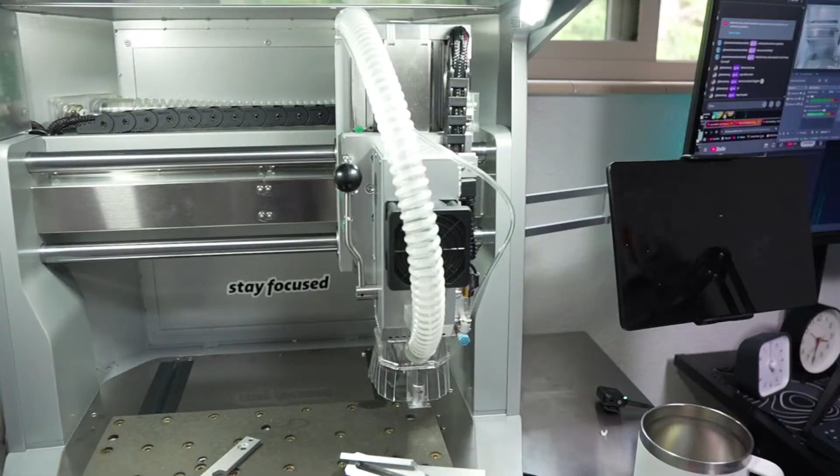So that is kind of what we're going to do today. That's a bit for the video part of this. It's not really going to make sense for the people watching the stream, but that's what we're going to be doing today. We're going to start a CNC project. We literally have 30 minutes. I don't even know if we can fucking do it in 30 minutes. I've never used this machine before, and we're going to do it right now.

The world's fucking burning. Our politicians are actively trying to destroy this world for personal gain. The motivation is slipping by the day. But regardless of whether you're motivated or not, you have to stay focused on your passion and your goal, because if those people didn't perform in those theaters back then, our culture would be different today.

So you, as a creator, as a person that wants to make shit today, know that you are influencing the future, and it is such a crucial time right now. Be that person that inspires other people to go the extra mile. Be the person that inspires people to actually do something. You know what I mean?

I have this logo on my shirt called Stay Focused for a reason. It's the idea of having a project, a passion, a purpose, and to stay focused on that constantly, no matter what. So whether that distraction is me or someone else or the internet entirely, I would invite you right now to take inventory of what's distracting you, remove them and stay focused. If that means you stop watching the stream or this video, then stop watching it and go lock the fuck in.

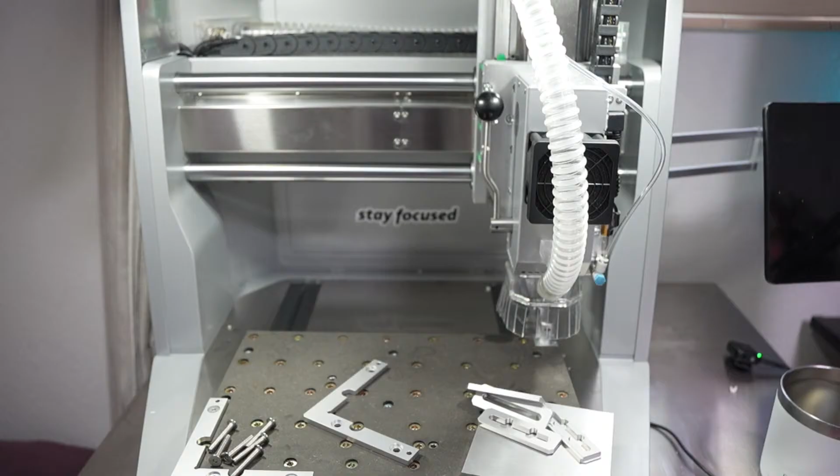All right. Live stream is in session, boys. That was just a little bit for the people watching this video afterwards. If you're watching this video, click off. Go stay focused. You know what I'm saying? Okay.

Jacob Jones stream speed run. Are you recording? No. It's fine. "Man, I just wanted to see funny CNC stuff." Don't worry, we're gonna see funny CNC stuff. Did we set it up? Yes, we did, and we're gonna go over that in a second. Yay, clean room. It is a clean room, actually. "Bro is not David Goggins." I am not David Goggins. I'm Jacob fucking Jones. JK, stay focused. You're goddamn right.

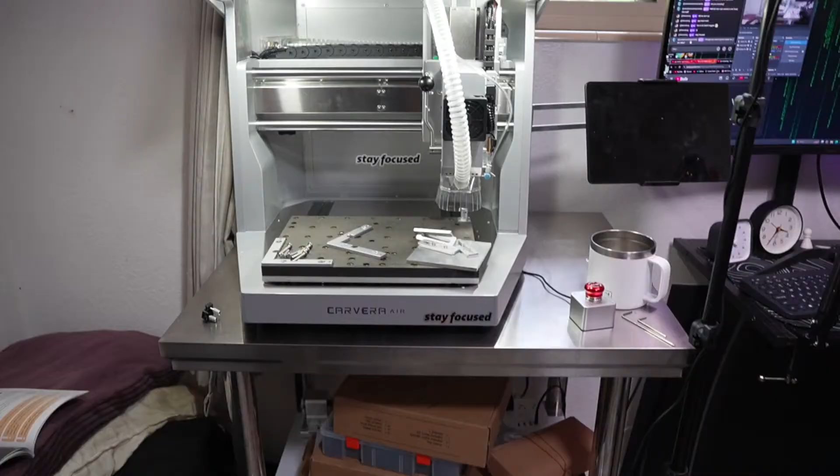I thought you weren't gonna stream the CNC video. No, we are not. But this is just a first test, and that is exactly what we're gonna be trying to do right now. So let's do that right fucking now.

Yesterday, please tell me this is still okay. Good. Yesterday, here is what fucking happened. We were like, why the fuck is it not plugging in? Why is it not connecting? It's because apparently on this microwave supercomputer, there are 30,000 fucking inputs. And on each one, I had to plug in the goddamn cord.

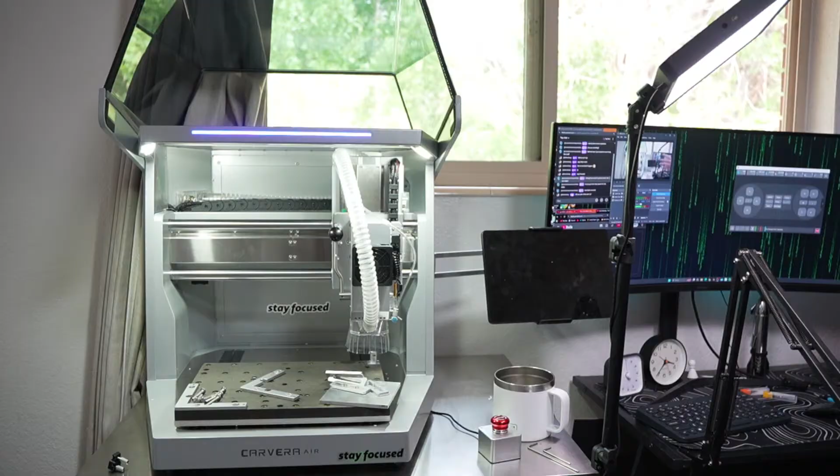I had to go through all of the different ports that were available inside of this fuck-ass software. And then after that, I had a fucking... Oh my god, dude, the process was so annoying. It took me hours to be able to connect this to the thing, and now it just works. It's over Wi-Fi. I don't understand how it works, but it works now. And now we can do this weird hunky-dory.

You'll see over right here, we actually have a CAM software, and we can move it. Oh, let's make it a little more pronounced. Let's do 10 millimeters. See, we can move it now. W. That's what I'm talking about. That is what I'm talking about.

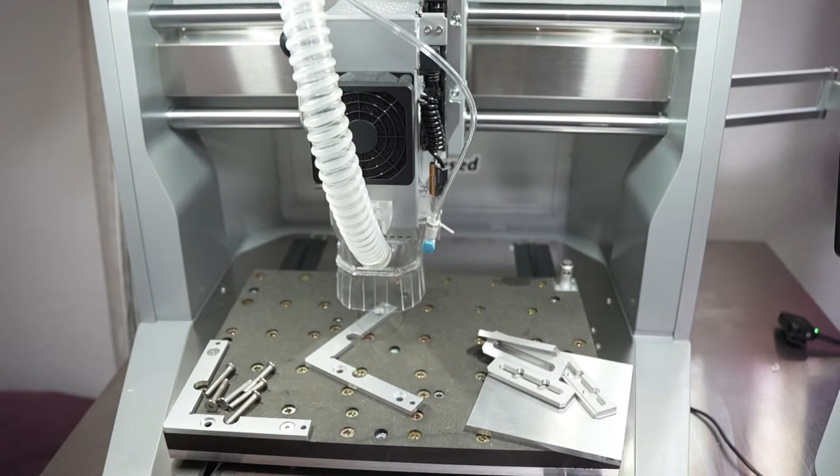And our goal today is actually to just do a tutorial, but then again, I have 30 fucking minutes because it took me goddamn forever trying to figure out how a microphone works.

Let's see. So you just did a big speech for the video? Kinda, yeah. And don't record it? Yeah, kinda. Did you give China your IP? I did. I fucking had to, unfortunately. Is it me or is the volume just a bit low? Adjusted right. Oh, well, hold up. Adjusted right there, and now it should be good.

Okay. Okay, boys. It is time to lock the fuck in. So there is so much that goes into CNC machining that I didn't even actually fucking consider at all. There is so goddamn much that is required to make something just go burr, and holy fuck, it's atrocious. It's actually atrocious. So today we are just going to, sorry, this is extraordinarily loud. We are just going to try our fucking best to get this thing to work. Like, that is all we kind of can do.

Okay. Oh my god, please tell me it's still good. It is. Okay. So we are actually just going to do a preloaded project. What is this? Think of it as like when you install the Arduino IDE, there are example sketches. We are doing an example sketch. Or like when you buy a new 3D printer, there might be like a Benchy inside of the thing. That's exactly what we're going to try to do throughout the next few minutes right fucking now.

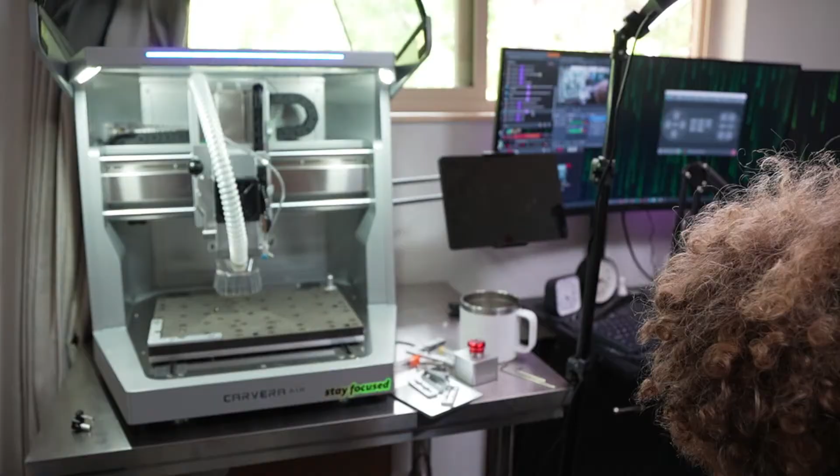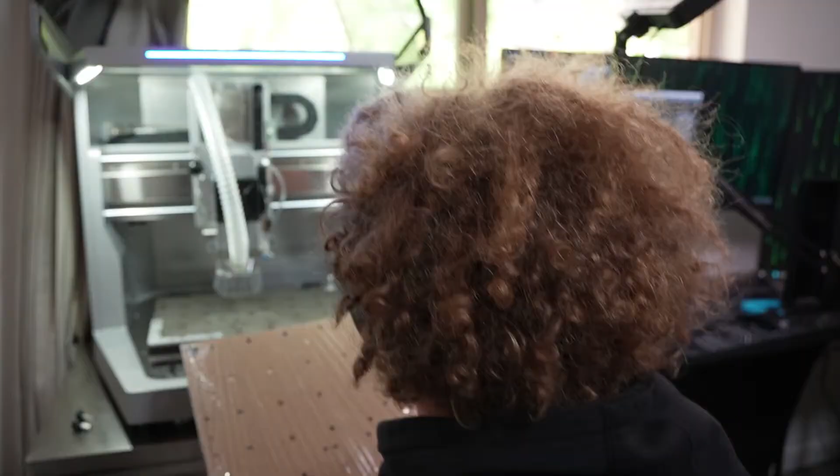Dude, there's so much shit that we should have done today, but this goddamn microphone was, I don't even want to think about it. Okay. So we need to start out by, oh, there's so much shit we got to do. Okay. We're going like this. Okay. We literally have not even 30 minutes. Our time was completely wasted today on just trying to figure out how in the actual fuck this fuck-ass thing works. And yeah, no, so fuck DJI for that. Although their products are really cool, still fuck them for that. They wasted my day.

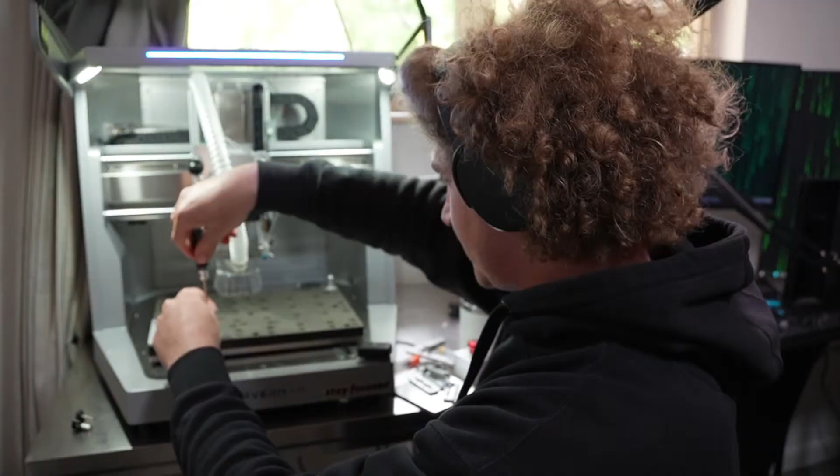And yeah, I watched like 30 fucking videos and read the entire manual. The manual is ass. Their teaching videos are ass. We just have to fucking wing it, guys. We just have to wing the fuck out of this thing. And hopefully it just performs, you know what I mean? That's all we can do at this point.

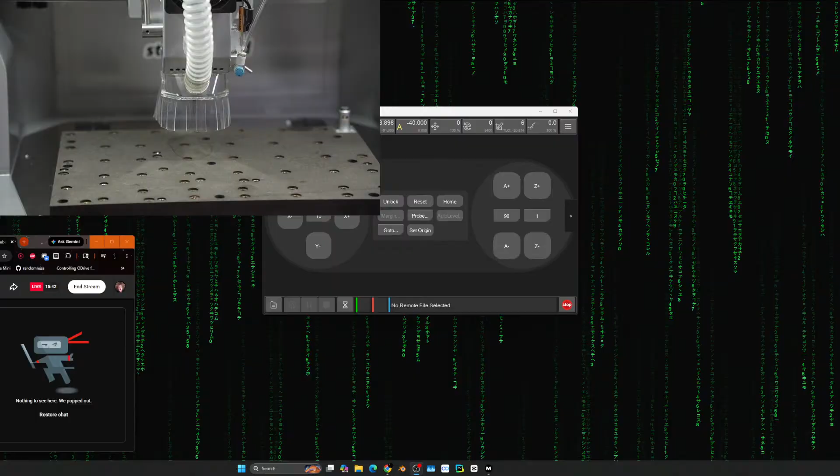Okay. Well, let's see. Like this. I hope there's no background noise, but if there is, whatever. Well, so we are going to actually, well, don't fucking pull out the thing. We're actually going to start by going right here. This is what we're going to start out doing. All right, let's go like this. So like that. Okay, if you guys can see, please don't tell me this thing's just died.

I don't know. Okay, so here you can see this thing, right? This is basically, what the fuck would you call this? It's like a controller kind of, right? See, I'm gonna click this button, it moves over. I click that, it moves over. I click this right here, it moves back slowly. I click this, it moves the thing. Let's do 10, right? You know how this works.

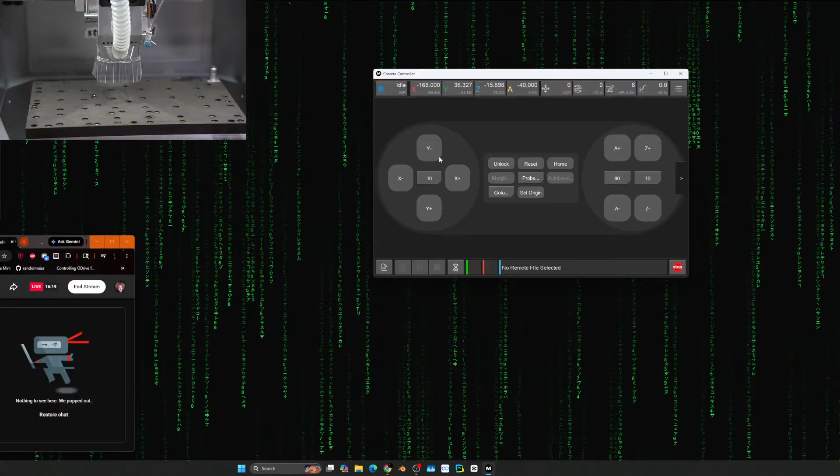Now, the $1 million fucking question is, how do we get a file from here onto the fucking CNC machine? I don't know.

Let's do the relief test. Pirate ship. Select, rename, delete, new folder, relief.

The question is, do we have to install this thing right here? I don't know why, but it protects the build plate, I guess, but I don't know what with. I don't know how. Let's find a video real quick.

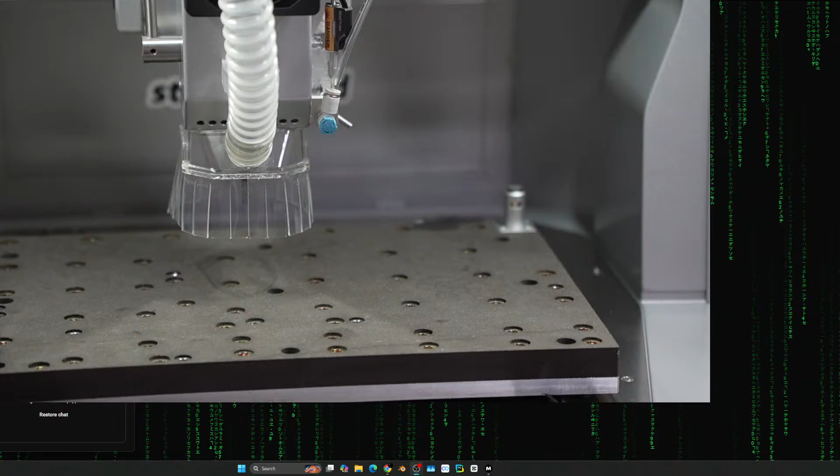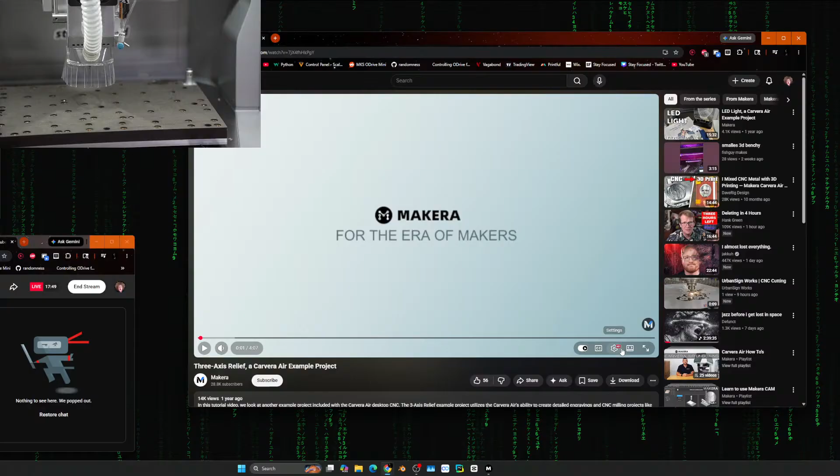Oh well, there you go. Let's find a video. Actually, it might be in my history. You guys are gonna see some wonky history right now. Go to history, right here. I don't know if you guys can do that, but this is what we're gonna follow. Not full screen. Jesus Christ, I have to be at work in 4 goddamn minutes.

Hey everyone, Jason from Makera here with another Carvera Air tutorial.

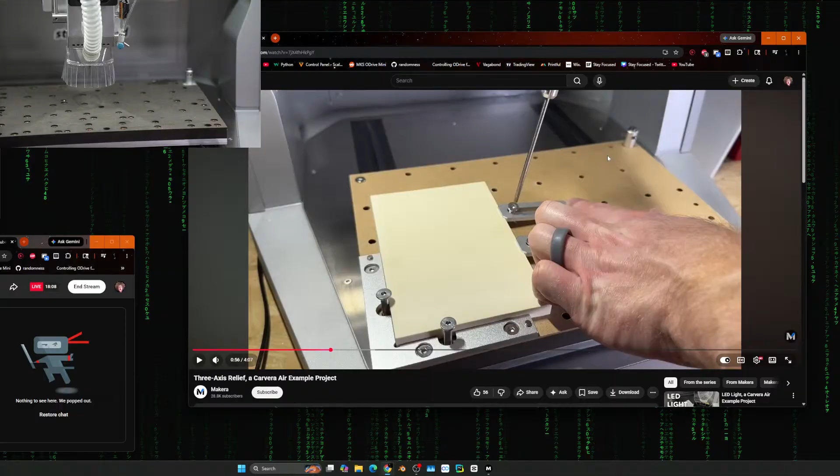Yeah, how do we install the goddamn thing though? Okay, so we're just gonna look at it. How does he install it? Okay, he just has screws. Okay, that's what we're gonna do. That's exactly what we're gonna do.

Dude, what is up, my boy? I hope you're doing absolutely swell, you big man. Sir, I love calling you Terry because it just fits.

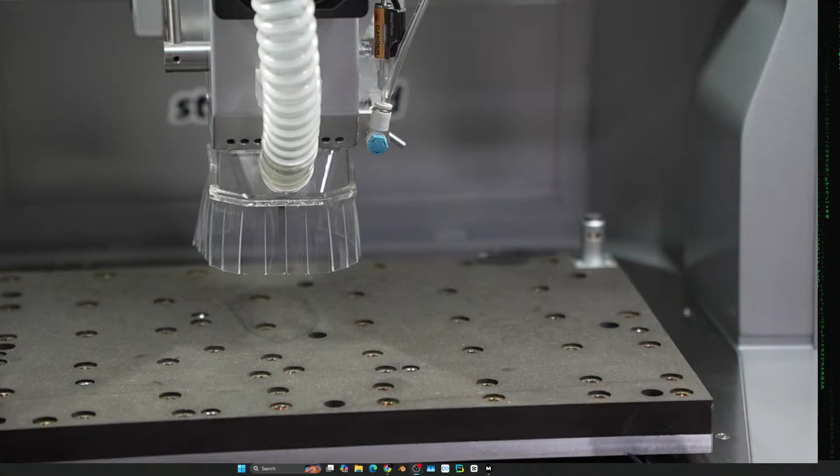Okay, here is what - oh shit, there's 2. That's cool. Here's what we're gonna do. What's happening? Okay, you have these now, you have to install them. I can only assume just like this. Yeah, just like this. Well, why does his look different?

I don't know. Okay, let's go like this. Let's go like this. There we go.

Oh, it smells so plasticky. Not plasticky, but I don't know how to describe it. Let's see.

Exactly dude, Terry reincarnate, that is actually big. Okay, I don't know if this has to be on every single thing, but I don't even know, dude. We're gonna do it anyways, you know what I'm saying?

Okay, let's go like this. God, it sucks because I literally have to be at work in like 3 minutes. I was really hoping we'd start the CNC today. Maybe we can. We are to follow the homie's instructions exactly and just pray that we can start the CNC machine. We might have to stop it, but if we do, we'll learn stuff anyways.

Okay. These things are just to protect the thing underneath it.

Okay, well, why did I just... Jesus Christ, I'm fucking autistic. I don't know why I didn't just remove the... Okay, yeah, well, yep. Okay, let's go like that. That is good. I hope, I pray, I think.

Okay, let's see, let's see. Let's go like this.

Bro, my OCD, one sec, let me move this. My OCD is actually tripping because I saw a screw that wasn't fully in, surrounded by a fully in one. Well, SLB sometimes, you know what I'm saying? SLB sometimes. But now, we must.

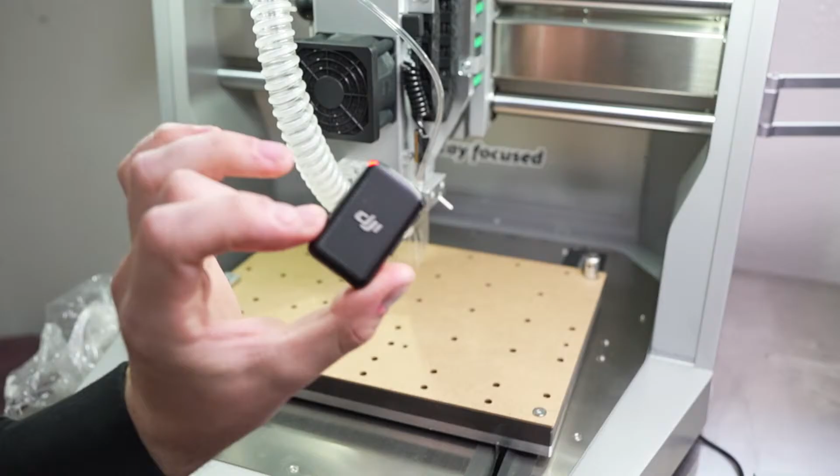Okay, now we need to find some stock materials. Where is that? Right here. Okay, I hope you can see this. I don't know if you can.

Yeah, there we go. Okay, the thing we're cutting is, I think this. Oh, it feels so weird. It's not wood, by the way. It's like a polyurethane or some type of thing.

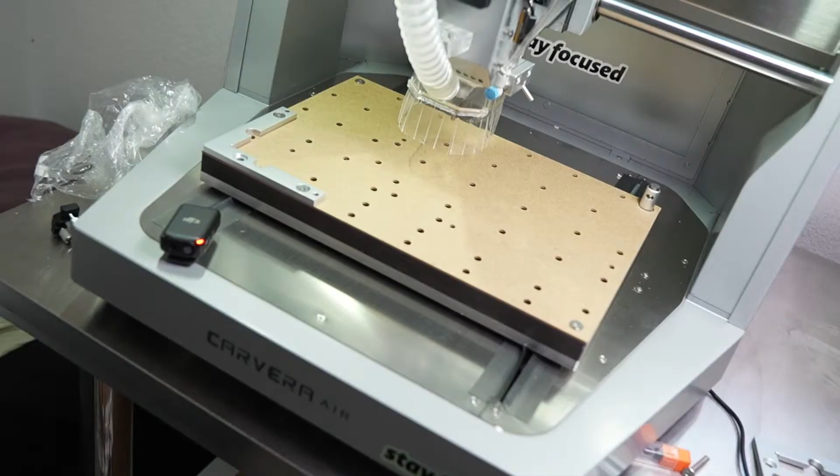Let's go like this. Please, for the love of God, work. Okay, let's speed run this. Okay, well.

Yes, I did. So basically now we have - so okay, this thing, right, the iPad, I don't know why the hell it doesn't work. We don't know why, we don't know how, but it just doesn't work, and that's that. So yeah, but that's how it be sometimes.

Let's go like this. Let's go like that. Let's go like this. Close, let's go like this. Actually, let's just go home. All right.

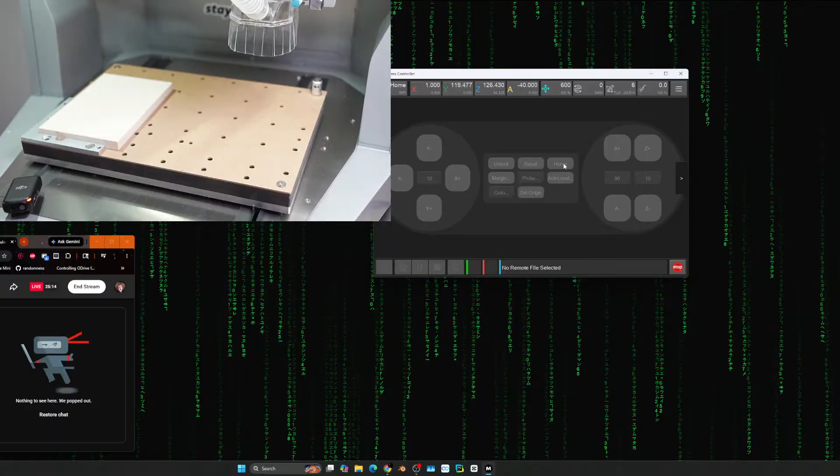Now we should be able to. All right, yeah. What just made that noise? Oh my god, don't tell me that there's a screw under there.

I hope that there's not. But there might be, I think there is. Damn, well, there might be a screw under there. Well, shit, well.

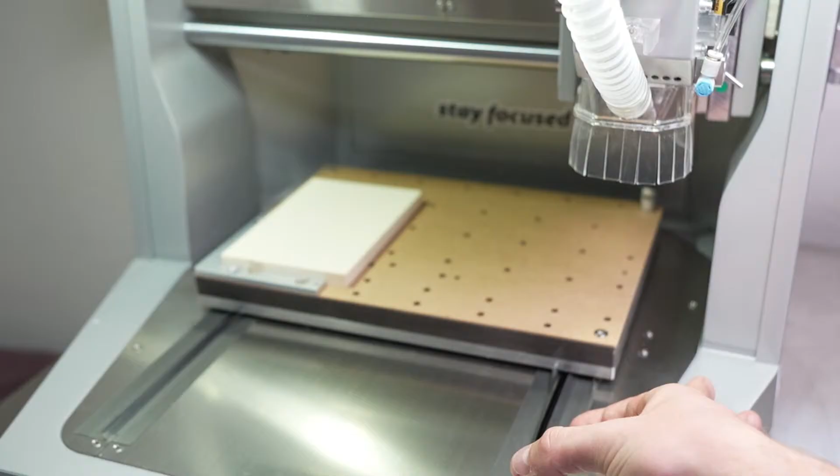Well. What is this and why is it right there? I do not know why. Oh, that's why, god damn it. Well.

Good to know, this is not supposed to be in right there. That is not supposed to be. It just completely demolished this right here. Oh well, we're learning slowly.

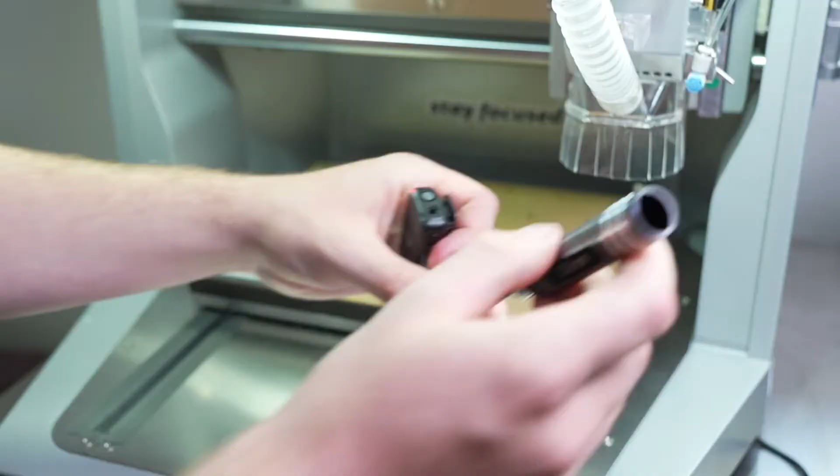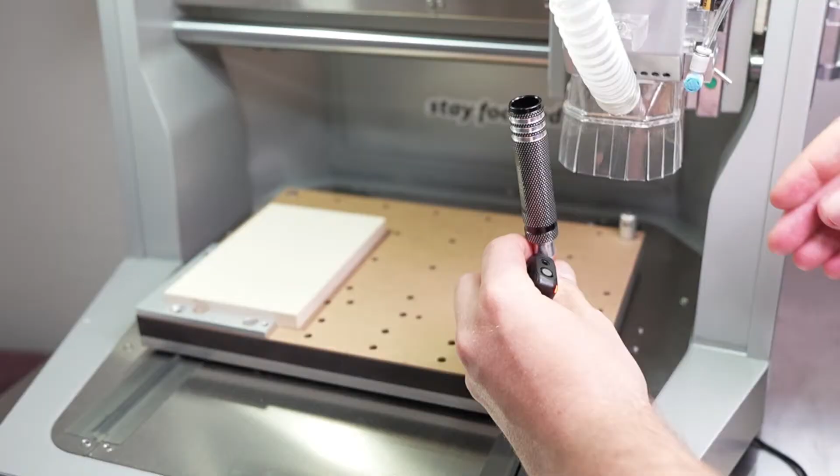That sucks butt, that sucks a lot of butt. Okay, well, we have to move it. Yeah, that sucks a lot of butt. I don't know how that's supposed to be secured. But, oh, the back one's destroyed too.

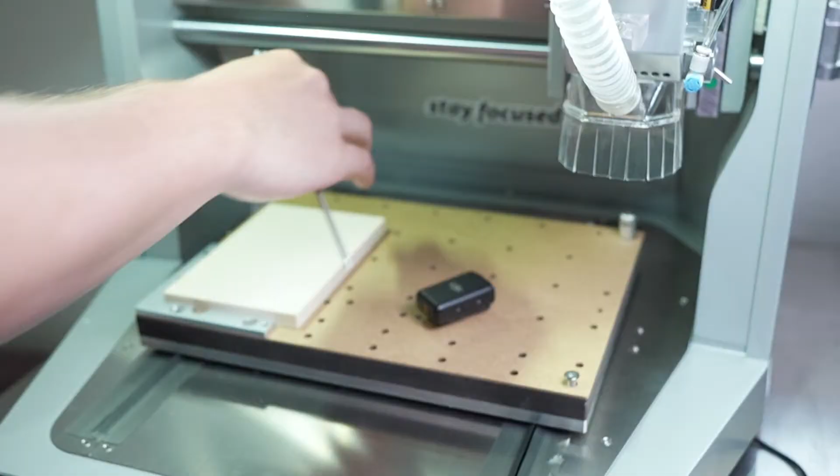Fuck me, dude, we haven't even started the goddamn printer. We've already destroyed the damn thing. Oh, that's ass, dude, completely destroyed it already. These tabs back here, fuck.

Well. Well. Let's see.

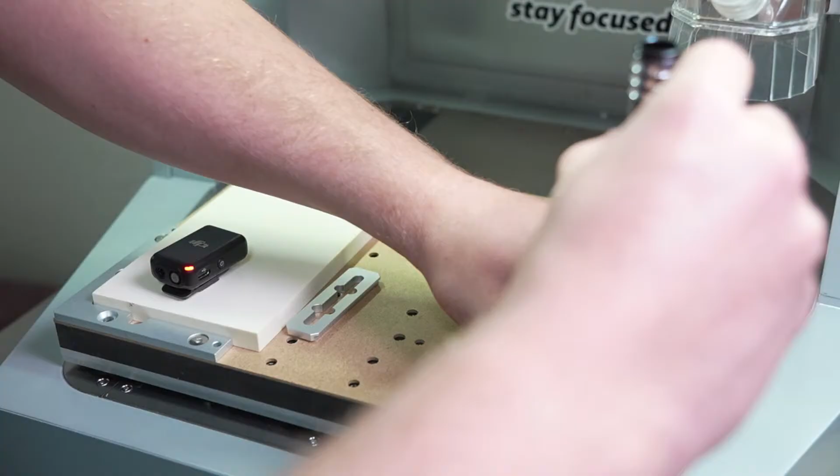Oh, this is going to be such a long learning process. I can't even describe just how slow this is going to be. Okay, well, that's as any learning process is. Learning sucks, or learning is hard, and doing hard things sucks, and sucking sucks. But sucking is the price that has to be paid for greatness.

Well, please don't take that out of context, if you know what I mean. Yeah, well. Like this, now let's get in the right goddamn screws. We've only destroyed about $20 worth of stuff so far, so we're doing pretty good. Let's go like this.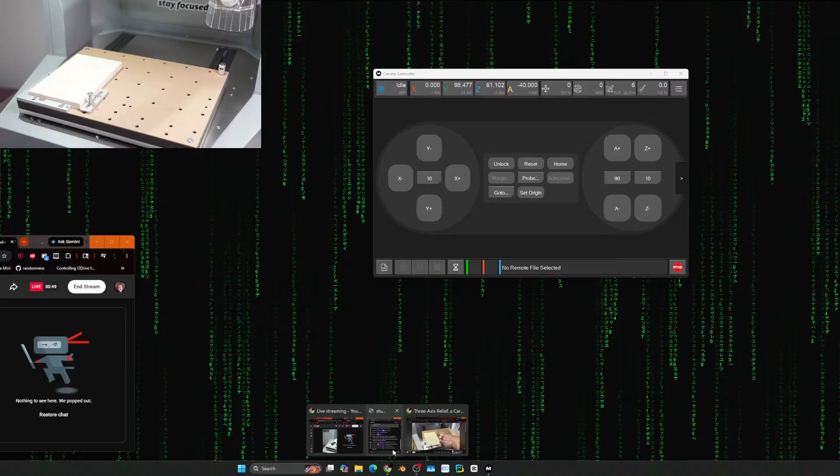Should I feel like this is something I should watch the video for? Let's give it a quick watch. Let's give it a quick watch. Let's go like this, let's go like this, let's go like this. And I am actively almost late for work.

That's okay. Guidebook: aligning it with anchor position 1 in the bottom left corner of the bed and securing it by placing a top clamp along all the... Amazing, that makes a lot more sense. That makes a lot more sense.

What was that? Okay, we know what to do now. Let's go like this. I was doing it wrong indeed, but now we know I was doing it wrong.

Dude, this sucks ass that I have to go to work right now. If I was a responsible human being, I would be going to work right now, but we all know that's not the case. I don't think it's ever been the case. There are projects to be made and progress to be made upon those projects. This is paramount to anything.

Okay, let's lock in, because we have nanoseconds to do this. Well, whoever designed this is a little interesting, because I can already tell this is not tight. It's not a good fixture. It's hard to describe if you guys aren't here, but trust, it's just bad.

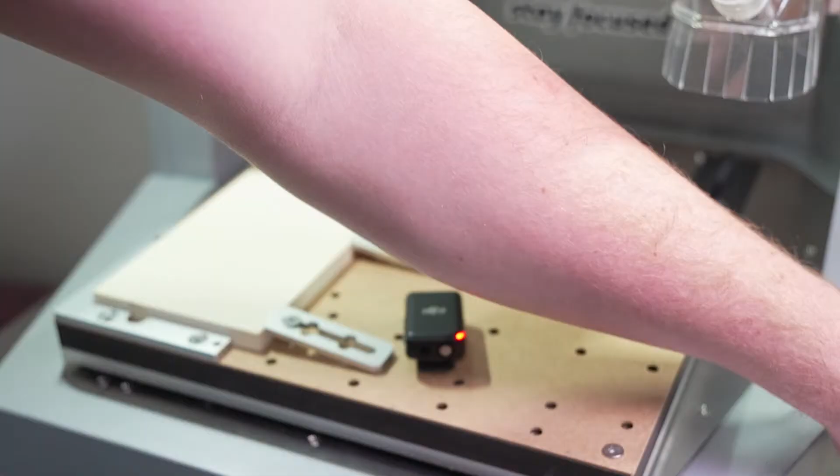Well, that's really long. We need screws now. More screws. We have one right here, and one right here. That should be good, right? I think.

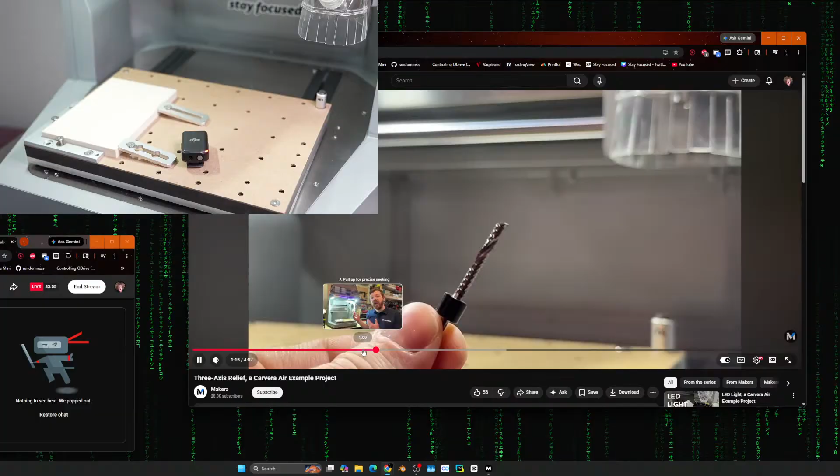Okay, we know. In this video, bed and screws included in their toolkit. Next is... dude, I'm actively late for work right now. Actively. God, work sucks, man. Why? Why work? Why do I have to go to work?

I desire spending my time elsewhere. There we go, I think this makes more sense. Okay.

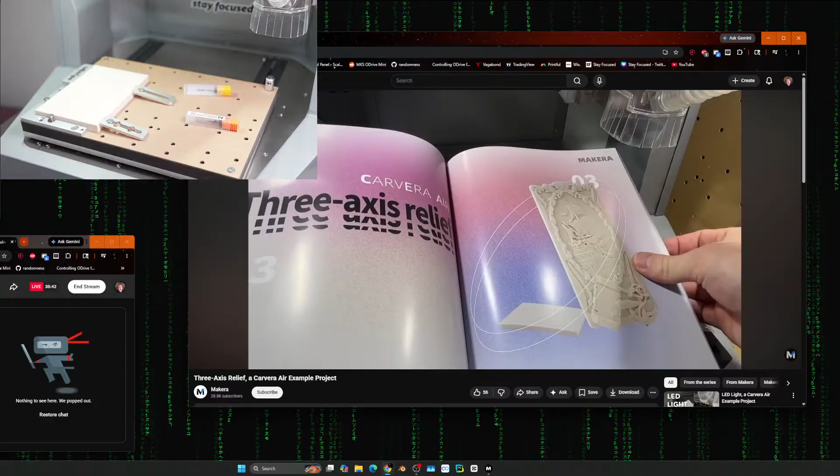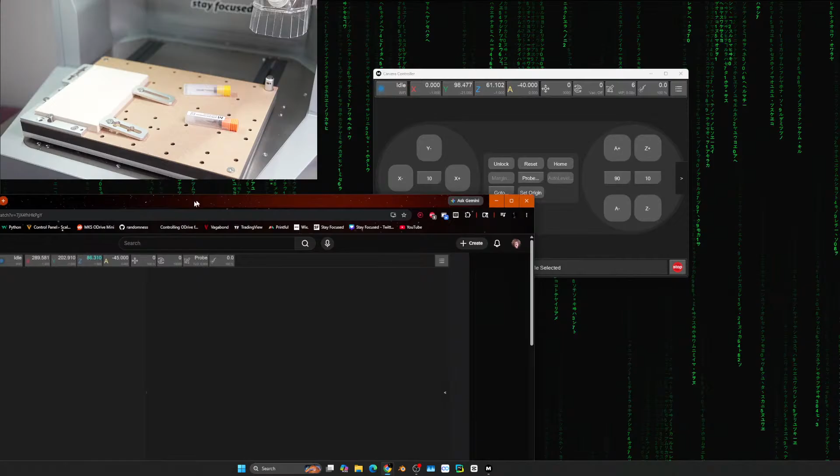With our CNC set up, we can head over to the Carvera Controller app to configure and run this job. First, we must connect to our Carvera in the Carvera Controller app. Then within the files menu, there's an examples folder that includes all the example files for the project shown in this guidebook. There's only one file for the 3-axis relief, called pirate ship. Once open, we can preview the design and toolpaths before clicking config and run. We want to make sure the file is aligned with anchor point 1.

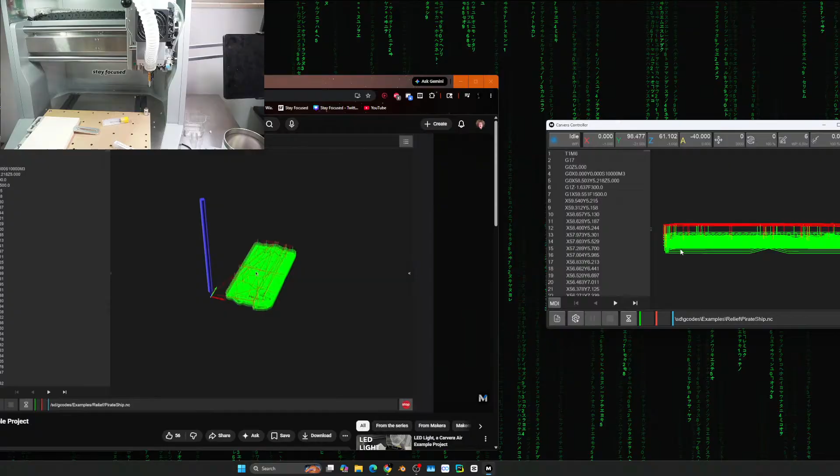How does he preview this? Oh, look at this. This is the first time I've seen this. It's kind of cool, actually. Look at that. That's sexy. You guys can't really see it. I guess it's off the screen a little bit, isn't it? Sexy. Very sexy. Okay. Let's go like this. Then let's go like this. What does he do after this?

Once open, we can preview the design and toolpaths before clicking config and run. This needs to go away. We want to make sure that the... what did he just say? How does he preview it? What does he click on? Once open, we can preview the design and toolpath. Yeah, see, he doesn't say what he clicks on. Oh well.

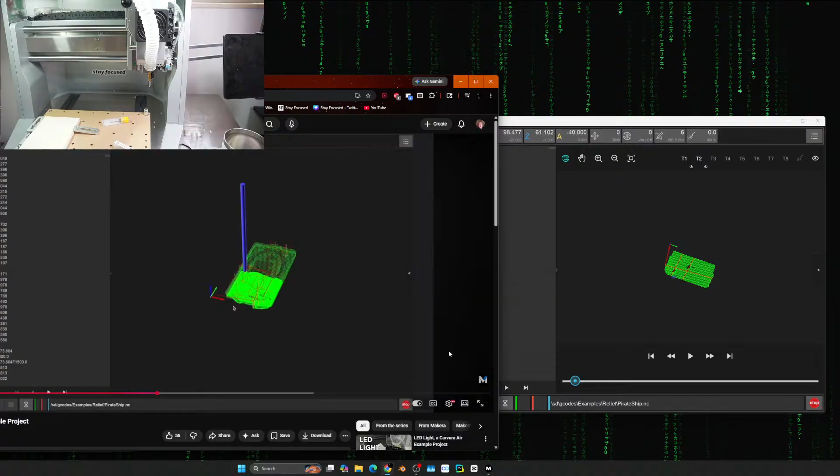There we go. That's our goal for right now. How long will this take? It probably says, but I have no idea. Okay, cool. Now, where does he click? Preview the design and toolpaths before clicking config and run. Okay, settings. Click settings. Okay, we're getting there. Well, there we go.

That the file is aligned with... Well, my stuff looks a little different. Auto ExtOut. What? Well, anchor point 1. Set origin. Okay. Sure. In the Carvera controller, just like our stock. Oh well.

Tutorial hell, Ben here. Yeah, dude. Seriously. Oh, what's up, my boy? I hope you're having a swell time. Thank you for stopping by again. By the way, I checked out your channel. You were a minor like 8 years ago. You're no longer a minor, big man. There's no way you were a minor, because your videos were like 9 million years ago. Now you couldn't be anymore. That's not possible. You lied to me, big man.

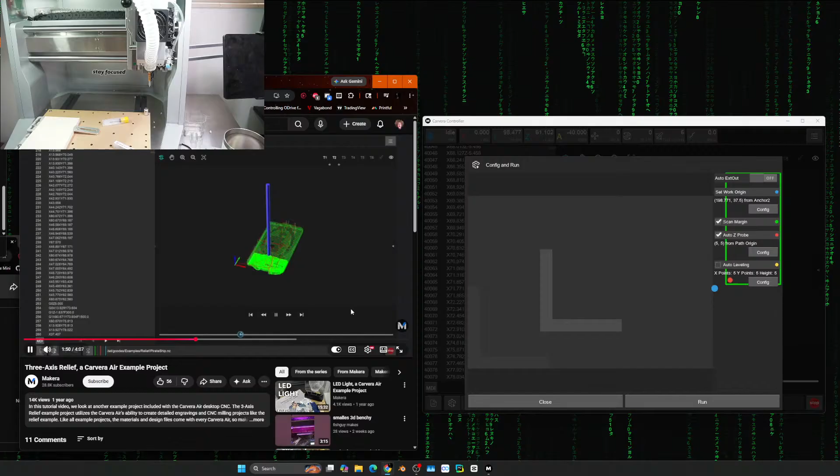We gotta lock in. We are late for work right now. Config and run. We want to make sure that the file is aligned. See, he has all this stuff. I don't have any of that. None. I am extraordinarily confused right now, because okay, we're gonna close this. Okay, we have his selected thing. Let's do exactly what he does.

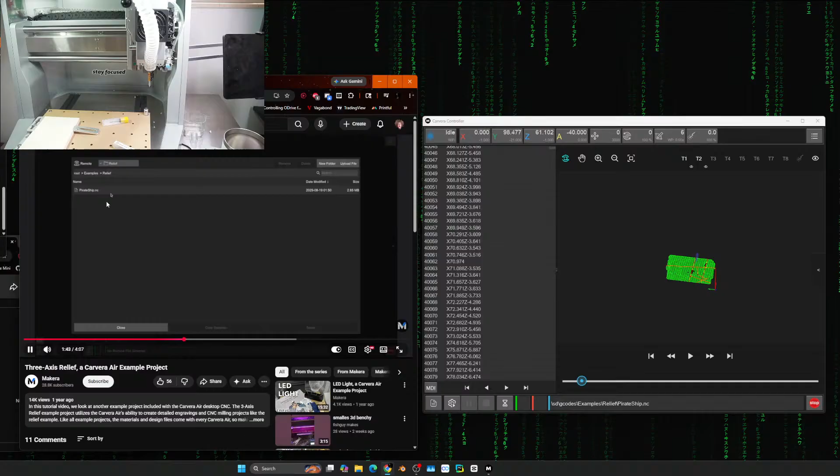Then within the Files menu, there's an Examples folder that includes all the example files for the project. Relief, Pirate Ship. Okay, select. For the 3-axis relief, and then he clicks on it. Once open, we can preview the design and toolpaths. We know how to do that. We're chilling. Absolutely bussing. Okay, what does he click on? Dude, this guy needs to get a cursor highlighter, man.

Oh, here's the orange triangle thing. This is not supposed to be right there, nor is that. This is supposed to be in the corner. Okay, let's do that. Aligned with anchor point 1 in the Carvera controller, just like our stock. Carvera Air. Oh, what? Okay, config. Just like our stock is on the bed of the Carvera Air. As shown in the guidebook, we want our offsets to be 3 millimeters for X and 3 millimeters. Okay, let's do that right now.

3. I'm assuming, I'm praying, I should say. I am absolutely praying to God right now that this is in millimeters and not nautical miles. For Y. We also want to enable scan margin. This traces the perimeter of our design before cutting. And auto... Okay, scan. Did he press okay? We also want to enable... We want our offsets to be 3 millimeters for X. Jesus Christ. 3 millimeters for Y. Okay, dude, he needs a fucking cursor highlighter, man.

This is gonna give me... Enable scan margin. Oh, well, look at that. Look at that. We're getting closer. This traces the perimeter of our design before cutting. Okay, scan margin. No. No, okay. And auto Z probe, which will set the height of our stock automatically. We do not auto Z probe. Sure. Leveling for this project, as we'll be machining all the way through the top surface for this particular part.

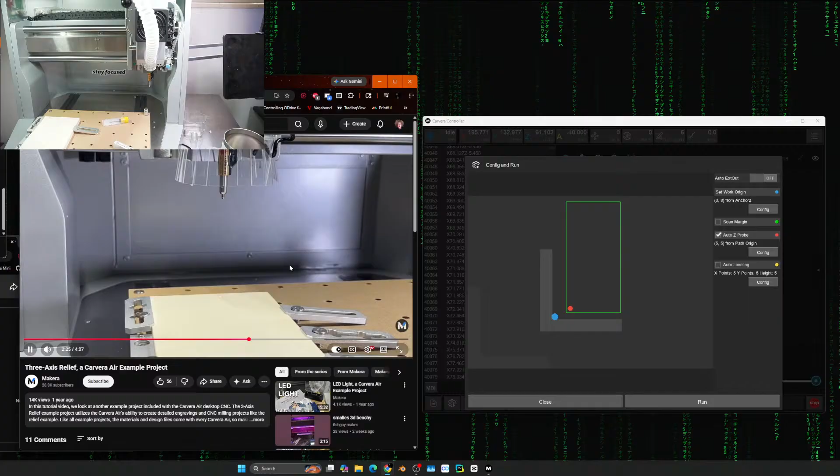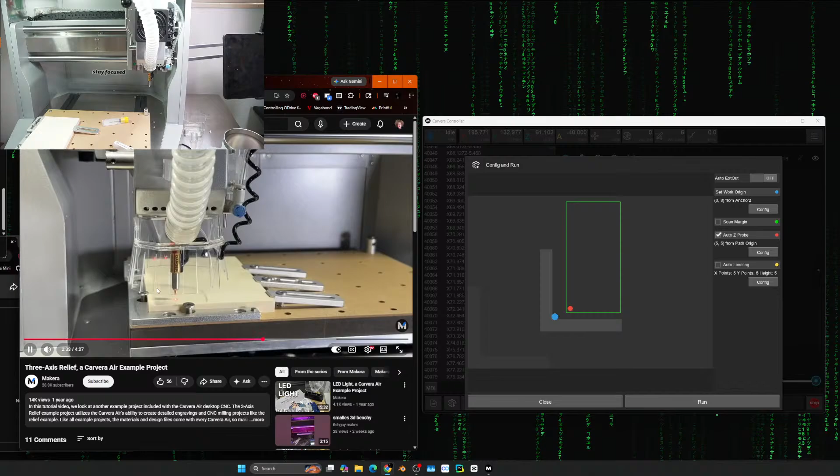The Carvera Air will first begin by scanning the perimeter of the part using the laser pointer built into the wired probe. Check to make sure that there's no... But you pressed on scan margin though, did he not? No clamps in the way or obstructing this margin. The Carvera Air will then probe the point set within the controller. I'm fucking terrified right now. We're just gonna do it. Before prompting us to load tool 1, both in the controller app and with a flashing light on the machine. After loading tool 1, the 25mm single flute end mill, we can press the button on the top of the Carvera Air to begin machining this part.

For the 3-axis the machine will start by roughing the stock using the 25mm bit. You can always monitor the progress of the machine in the Carvera controller app during the manufacturing process. After the roughing process has been completed, the Carvera Air will prompt us to load tool 2, which is the 30 degree. Once we press the button to continue, the Carvera Air will begin to cut the fine detail features of this design. It's difficult to see what's happening as we're cutting so deeply into the soft stock, but again, you can monitor what's going on in the Carvera controller app. Lastly, our machine will prompt us to load tool 1 again so that the part can be cut from the stock with an outer contour cut around the perimeter.

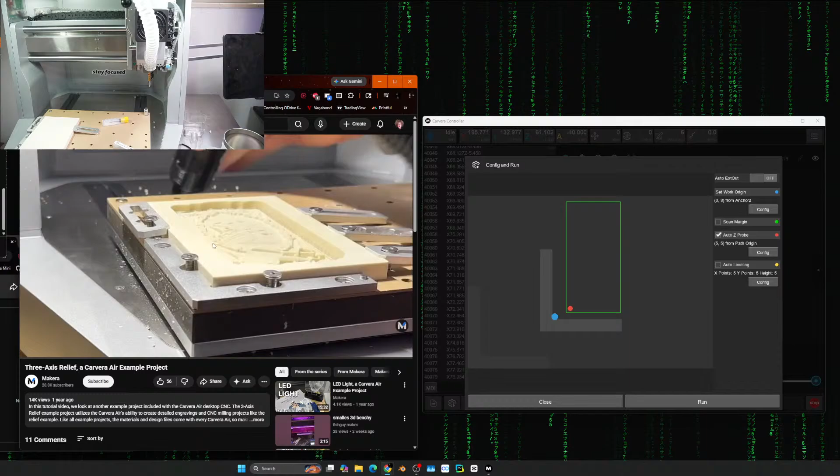Once manufacturing is complete, you can clean off this part using the brush or a vacuum to reveal the detailed design. After releasing the top clamps, you'll notice that the part is held onto the stock using what's called tabs. This stops the part from flying loose during manufacturing, and the tabs can be carefully cut using a small handsaw included in the samples and materials kit. And that's all there is to it. This is simple. Okay, that's what we're doing.

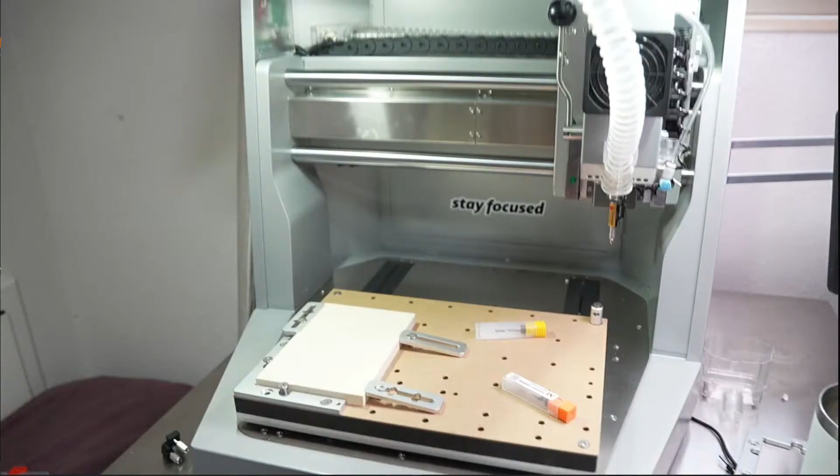Okay, yep. We got it, boys. Let's lock the fuck in, yeah? Let's lock the fuck in. Oh, well, let's first remove everything out of the way, right? Let's do that, ideally. Everything's not in the way. Okay, bam, bam. I think it's good. This is the moment. Make sure it breaks this machine. We pressed 3 buttons. I don't know what buttons they did, why they did, or who they did, but we pressed 3 buttons. And that is what we're going off of right now.

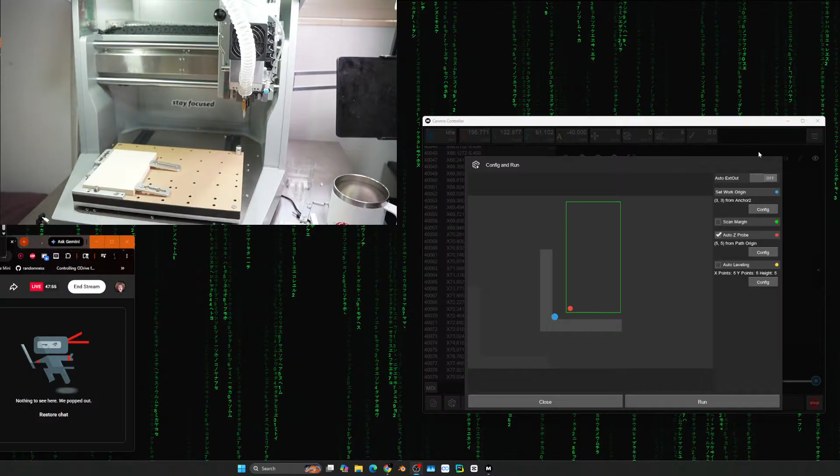Okay. I am mortified right now and scared to death. But there's only one thing we can do. And that's to press go. That's to press go.

He unclicked scan margin, so this seems off. No, this seems off compared to his. Like look at his. Let's look at his real quick. Right? Like let's go right here. Look at this. His thing is in this corner, and wait. Auto set origin config, block thickness set by Z probe, offset, note, work. Okay, look at this. This is different. This is way different than his. His is blurred out. What is different?

Scan margins. Anchor point 1 in the Carvera controller, just like our stock is on the bed of the Carvera Air. As shown in the guidebook, we want... Oh, anchor 1. We really click that. Config. Anchor 1.

Look at that. If we press go right there, we would have been royally fucked. We would have been fucked in the ass hard. Like just absolutely pounded from behind rigorously. That would have not been good.

Okay, boys, I think we're good now. Well, let's just double check. Config. That seems good. 3 millimeters for X and 3 millimeters for Y. We also want to enable scan margin. This traces the scan margin. Enable scan margin. Okay.

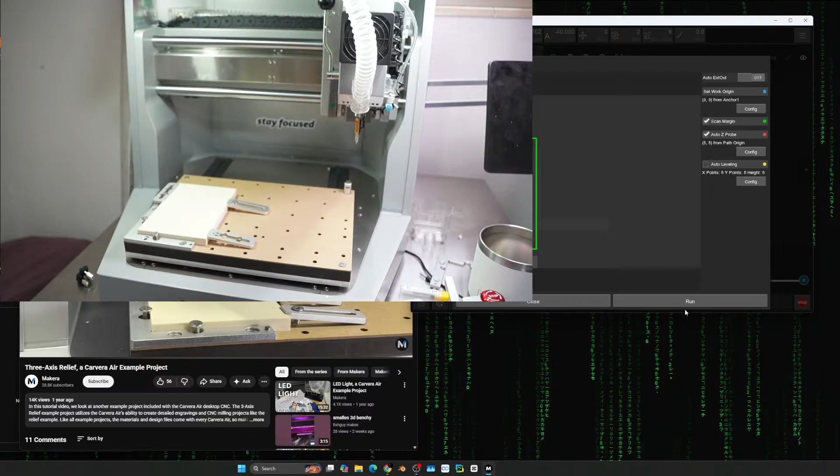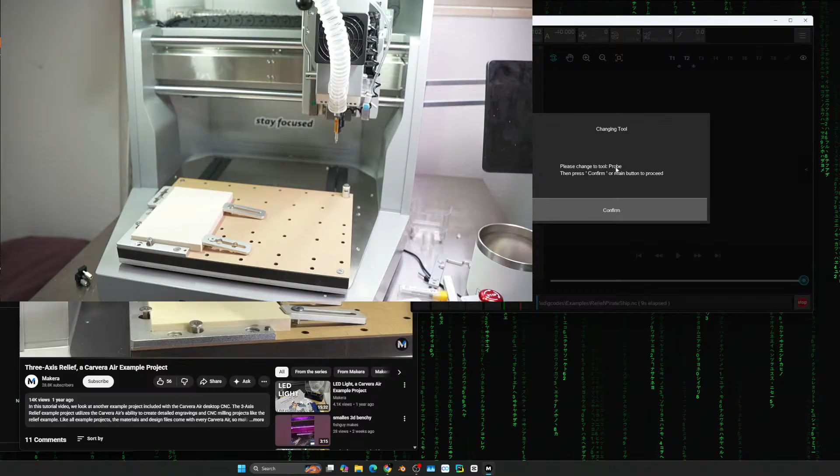Lock the fuck in. Let's see this shit go. Okay, 3, 2, 1. Boing! Wait. What just happened? Boing! Oh. Fuck, what just happened? Tool change. Please change the probe. Confirm main button. Wait, please change to tool probe. It is changed to the tool probe. Okay. I'm fucking scared right now. I'm mortified.

Well. That looks right. That looks right. Fuck. It seems right. I pressed 3 buttons. I don't know what the fuck's happening. That looks way too close to right there. What's happening? What's happening?

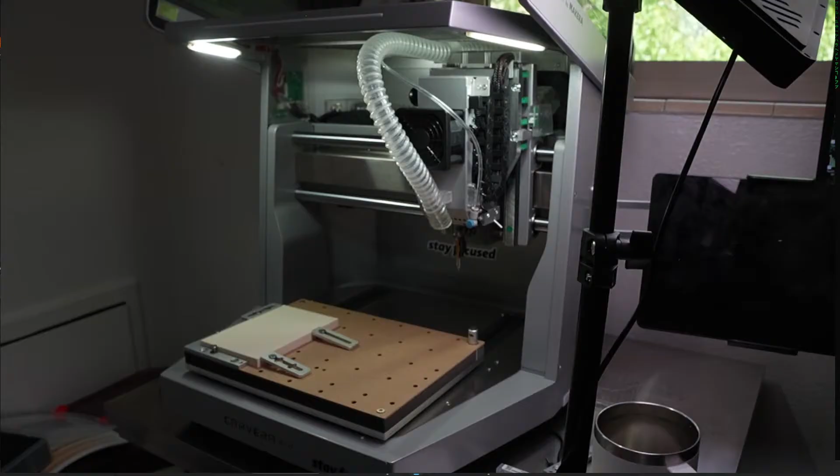Okay. Okay, now I think it wants us to change the tool. We're gonna do that real quick. Right? Change tool, let's check. It says change tool. Yeah, let's change the tool. Let's do that real quick.

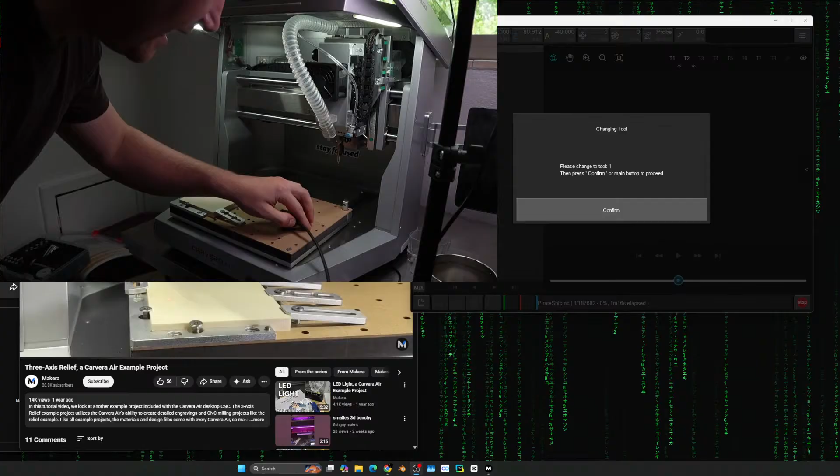I am actively late for work right now. I should be at my job as we speak right now. But no. Why would we do that when we can not do that?

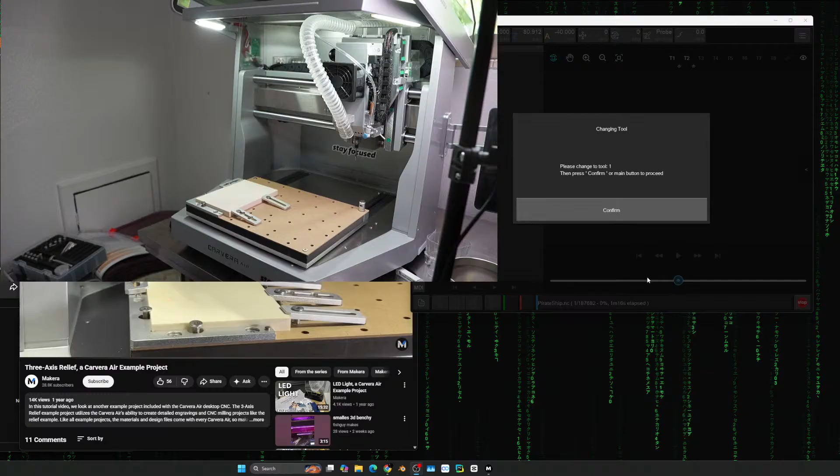How do I do this? Oh, that's sharp. That's cool. Okay. Let's go like this. Let's go like that. Fuck. I'm scared right now. Okay. Lock the fuck in, boys. He just said I can actually press the button on top. So that is precisely what we're gonna do right now. Why is this not locking? There you go. Okay. That is precisely what we're gonna do.

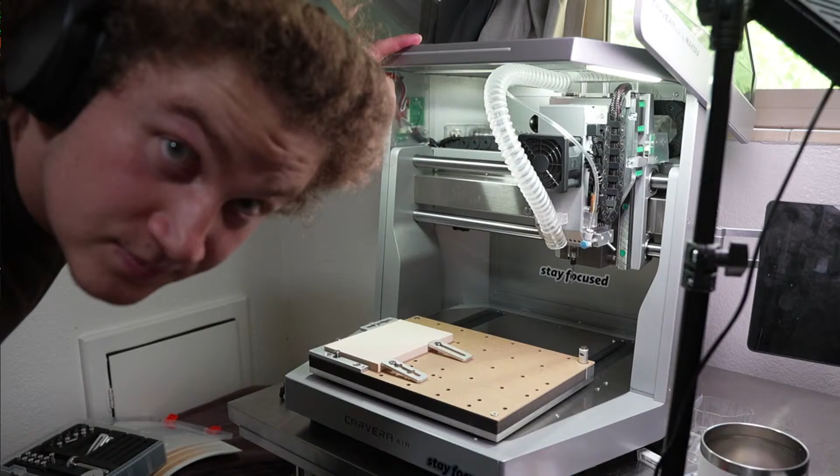The make or break moment. Oh, let's see if the camera settings are chill. Like this, bam, bam. Like this. Okay. Well, there's only one thing we can do. That's to start it. I pray to God that this isn't about to blow up. Should I put this thing down, you reckon? Yeah, let's do that. Got the E-stop right here. Hey, that is way too close, brother. If you, okay.

I mean, it's working. It's working. Holy shit. It's totally working. Well, fuck. I didn't think that actually worked. I ain't gonna lie to you. Whoa, that's cool. Whoa. Well, it's fucking going. It's fucking going all right. Holy shit. That shit's going right now.

What's happening? Okay. Whoa. Whoa. It's pretty loud. It's pretty loud. Damn. Damn. Dude. This is fucking sick, actually. This is actually sick. Damn. I didn't think that this shit would work.

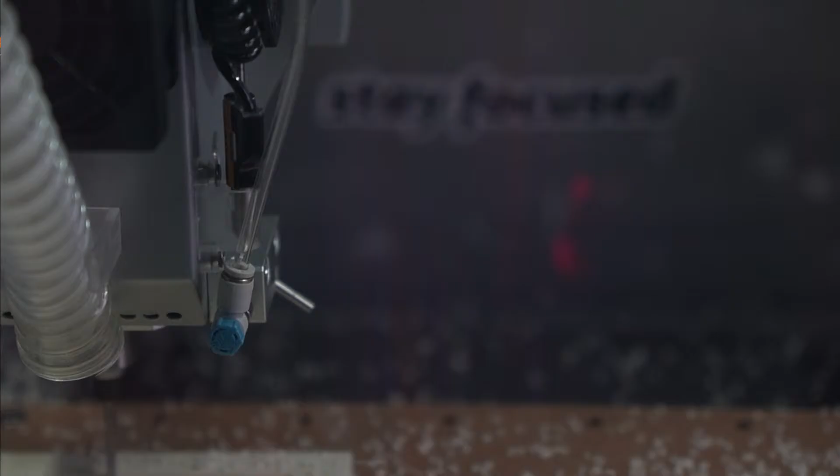When shit just works, you just. I don't know. It makes you feel kind of way, you know? It makes you feel something in your balls. I don't know how to describe it. You have to be a dude to understand it.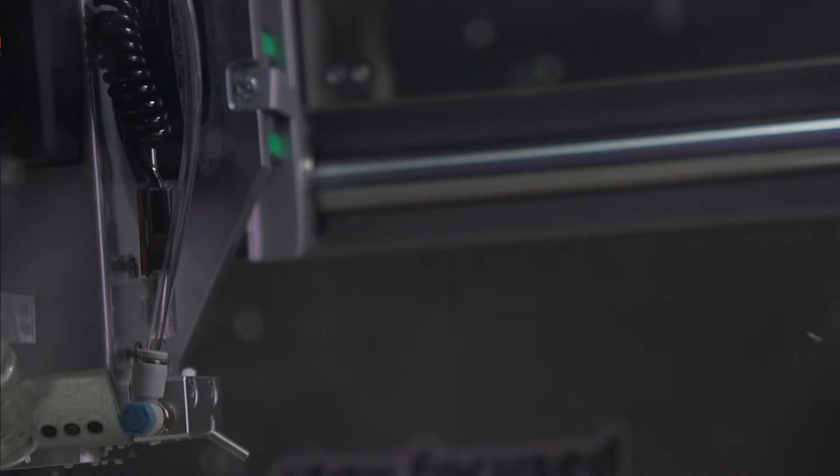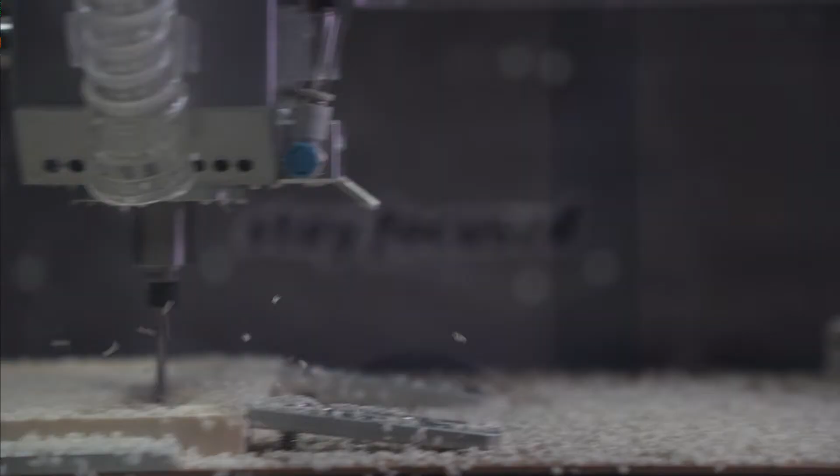Come on. Just like that. And that. Sorry, boys. I gotta get this camera pimping. There we go. Damn. That's crazy. Well, also now I'm realizing I should probably fix the. Like I need to blow off the things, so that they're not, you know what I mean, in the way. I guess.

Holy shit, this thing's actually working right now. Holy shit. It is kind of like a 3D printer, but it's just better in every conceivable way. Oh my gosh. It's pretty loud too. I ain't gonna lie. It is pretty loud. Damn, brother. Damn, twin. Hold on, I want to see if I can get the stay focused thing in the back.

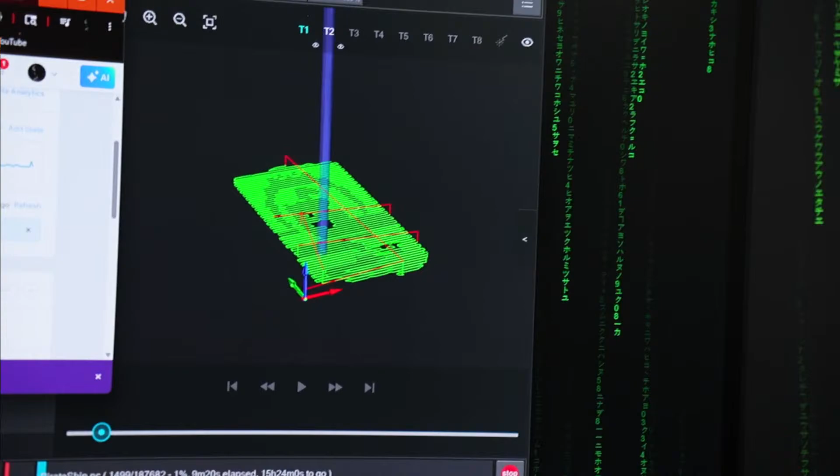This is why there is a shop vac, and this is why people recommend getting it. This is sick. This is so sick. Holy crap. W, dude. Holy shit.

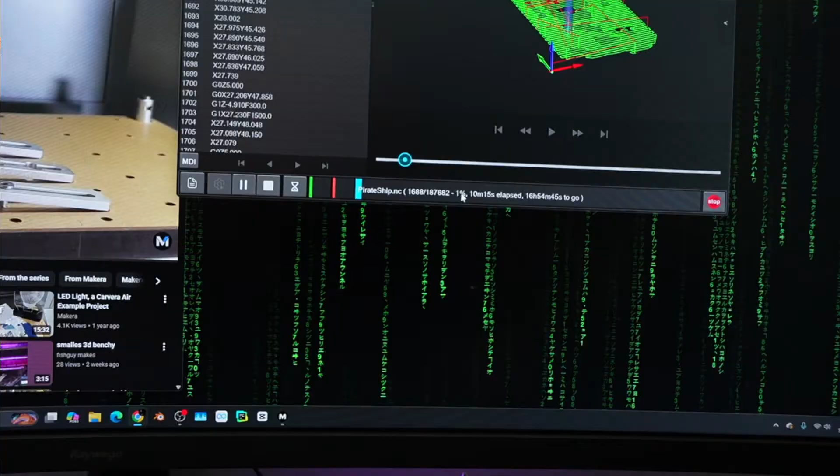Oh, this is way off. This is like off by a mile. I don't know if you can see that. That's way off by a mile. Maybe it isn't. I can't tell. I can't tell.

Oh, what's up, my man? You really have ADHD. My math exam is at 9 and it is, oh my God, get off right now. Go lock the fuck in. Stay focused. Where is it? Well, it's not gonna show up. Come on. Stay focused, big man. Okay? And go lock in on that goddamn exam, okay? You go lock in. Go to bed right now. That is your mission. Go to bed right now.

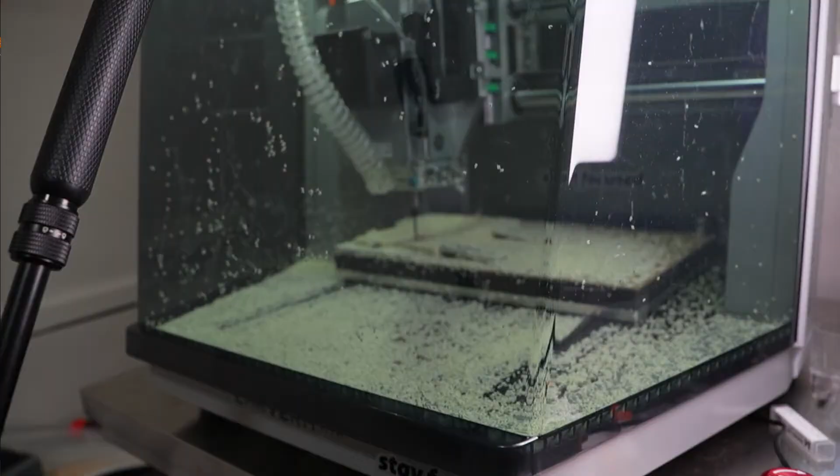I am late for work by 24 minutes. I need to be at work 24 minutes ago. That is a small price you got to pay for greatness. Holy shit, I got to go to work right now. Do I leave this thing running here? No, that's retarded. I can pause it and then we can resume this when I get back. I think that's what we're going to do. I have to go to work right now, guys, okay? Okay, well, you're gonna hear the CNC machine in the back.

Bro, this calculus, she is not good, dude.

Calculus is crazy. Okay, if you're just joining us, I have to go to work right now, but this is the first CNC project we've ever done. Carvera Air, whatever the fuck you want to call it, I don't know.

But if you are the type that enjoys making shit, the type that likes making rockets or, you know what I mean, like whatnot, you like making fucking programs, you like making something. Doesn't matter if it's a chiseled 6-pack in the gym or it's sewing. If you like making something, I implore you right now to stop watching the stream and go lock in on that fucking project right now. Stay focused. Well, I'm not wearing the fucking shirt. That's a little embarrassing. Stay focused, my boys.

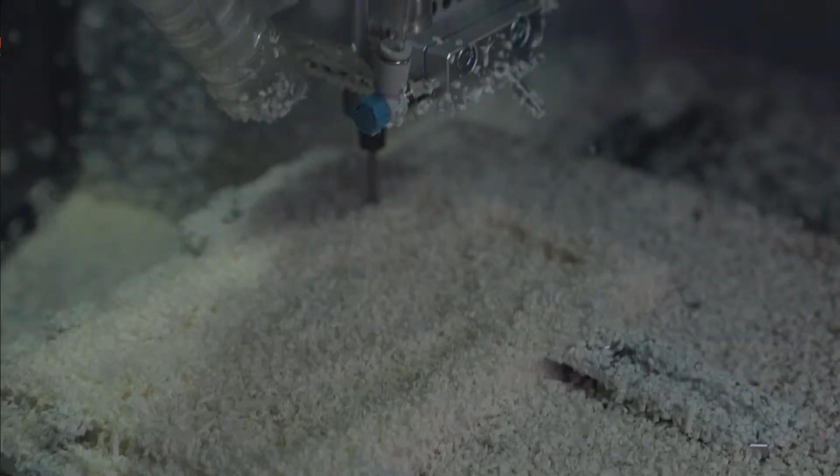And remember, above all else, whether you're feeling happy, whether you're feeling sad, whether you're feeling mad or glad, it doesn't matter. There's one thing you got to do no matter what. And that's to stay focused, my brothers and sisters. Stay focused. Okay? Lock the fuck in. Remove distractions from your life. And go do the hard work, especially when you don't feel like it.